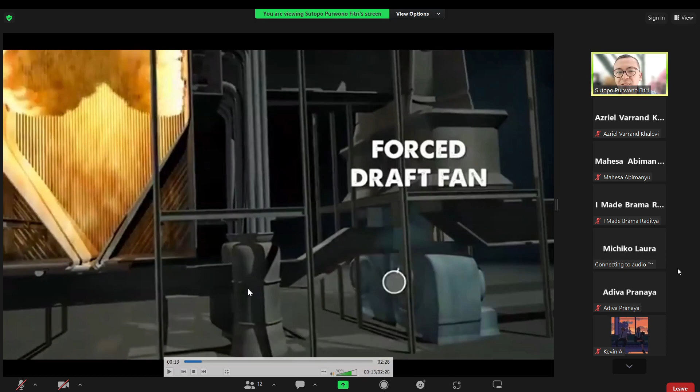Today's boilers, as they have been since their origin, involve complex production and manipulation of steam. Can you hear the video sound? Yes, sir. Bisa kedengaran ya suaranya? Ini saya pause. Dengar, Pak. Bisa ya? Bisa, Pak. Okay, I repeat.

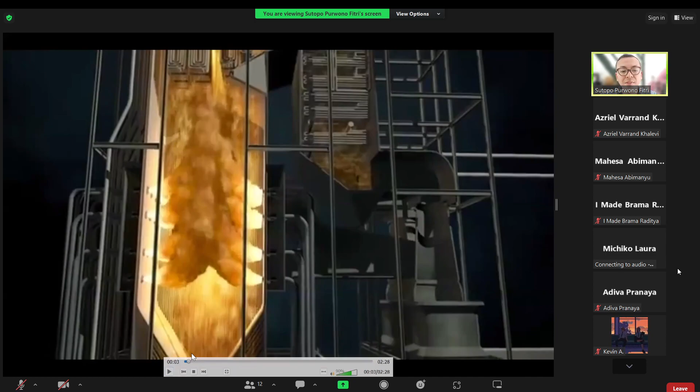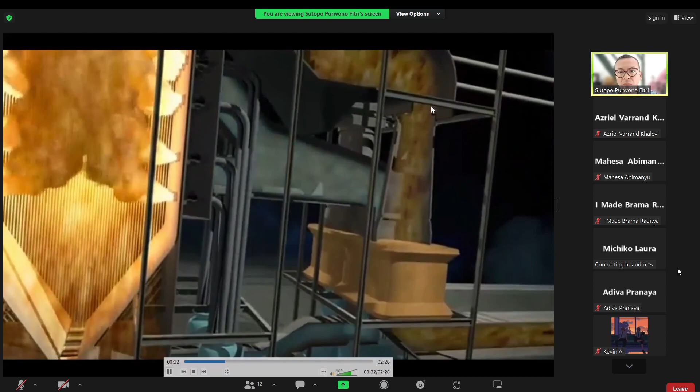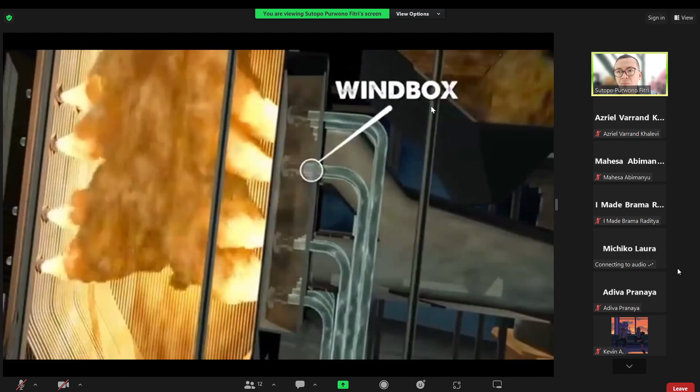Today's boilers, as they have been since their origin, involve the complex production and manipulation of steam. The forced draft fan blows air into the system. A portion is routed to the pulverizers, which crush coal into a fine dust before pushing the mixture up through feeder tubes. The other portion passes through an air preheater, which transfers heat from the exhaust gases to the incoming air, raising the air temperature, reducing moisture, and producing a cleaner burn. The hot forced air and coal dust converge in the windbox, where the mixture is blown out through burners and ignited inside the firebox, transferring radiant heat to the water-filled tubes. The hot gases flow upward, heating the rest of the system through convection, before passing through the air preheater and ultimately flow to the scrubber, where pollutants are removed.

Okay, so we see this video. The video shows the basic operation system, the running of the boiler, starting from the combustion process inside the furnace, to burn the fuel and heat the tubes. We can see this is a kind of animation. This is not a real boiler, but it's almost similar to the real boiler.

So there are many tubes, numerous tubes inside the furnace, containing water inside. The furnace creates a combustion process, to burn or heat the tubes, the rising tubes. Then the flue gas goes to the stack, or maybe this pipe, the port of the exhaust gas. There are many systems that we will discuss later, from the firing system, the feed water system, the exhaust gas.

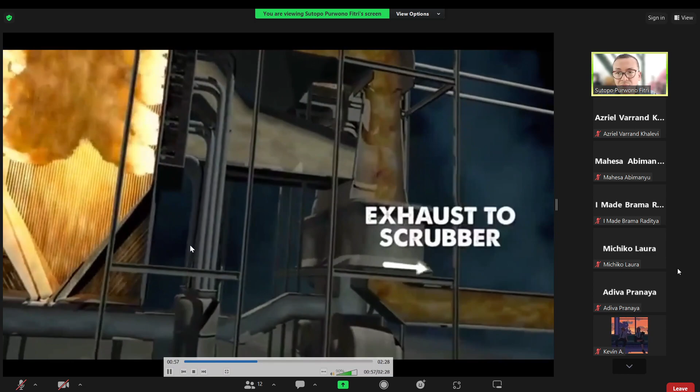So as I mentioned maybe in the former meetings, the exhaust gas or flue gas is not only for heating up the rising tubes, but the rest of the energy can also be utilized to heat the superheater, the economizer, and also the supply air preheating. So the preheater is very important for the supply of air for the combustion process in the boiler, because this is an external combustion engine, different from the internal combustion engine. So the exhaust gas, before discharging it to the atmosphere, sometimes needs to flow to the scrubber, to reduce the emission.

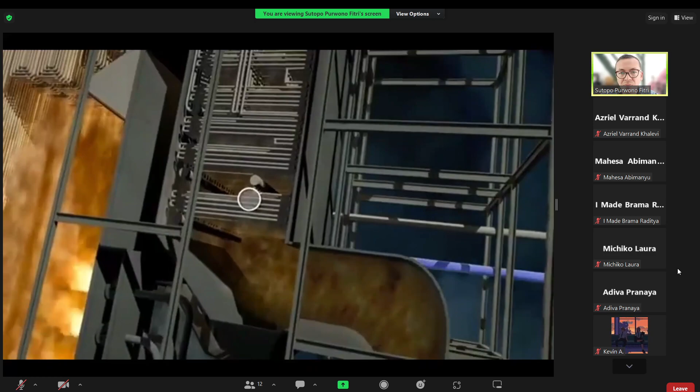Where pollutants are removed, liquid water is pumped into the system at the economizer. Gradually, it's heated to base temperature before gathering at the steam drum, the system's main distribution hub for circulating water and steam through the boiler. Liquid water flows through large downcomers and into the base of the firebox. A network of 2-inch tubes line the firebox walls, and burners force feed a continuous supply of combustible fuel into the ultra-hot firebox. Eventually, the insides of the firebox burn so hot that its surrounding steel walls would melt if not for the tube-lined walls of liquid water.

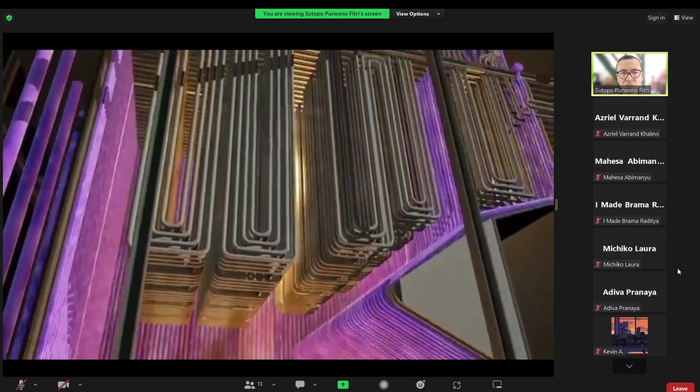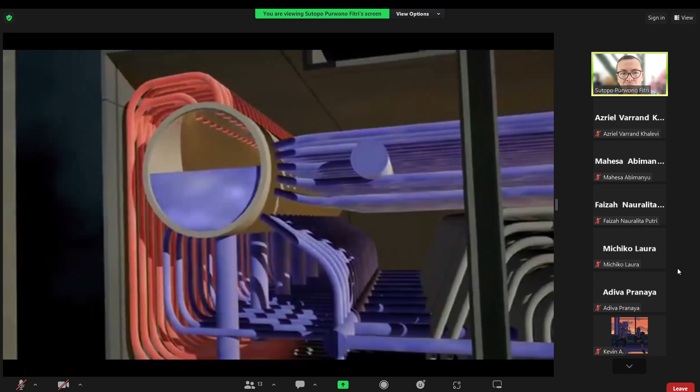At the point in the cycle when the liquid water turns to steam, the steam separates and collects at the top of the steam drum. Because this saturated steam still contains small amounts of liquid water that would cause corrosive damage to the turbine, the saturated steam is routed back into the firebox and through superheaters to burn off all but the smallest traces of liquid water. This dry, superheated steam then exits the boiler, passing through a steam header and ultimately providing power to the spinning turbine, which generates electricity. Finally, exhaust steam, now at a lower temperature and pressure, is sent back to the boiler through a dedicated reheat stage. This reusable steam is brought back up to operating temperature before returning to the turbine, providing additional power through a secondary stage.

Okay, so today we will not discuss about the steam circulation or maybe the air preheating, the other system, but we will focus on the combustion.

So from this video, maybe you have seen the first step of the boiler operation. You have a combustion inside the furnace, and you have also the rising tubes containing water. And then the flue gas or the exhaust gas should be discharged to the environment.

But before discharging to the environment, you can use it as energy to heat the steam, the saturated steam. The steam from the rising tubes goes to the steam drum, but the condition is still saturated, and it is not allowed to use it saturated for the rotating turbine. So you have to superheat it first, and in the superheater you have the dry or gas vapor form.

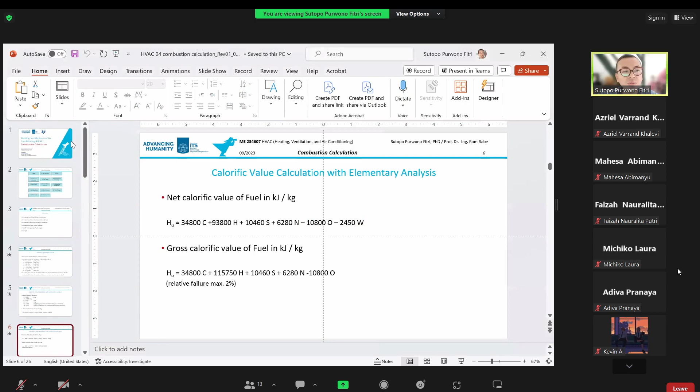Okay, can you see the slides now? Yes, sir. Okay, so the combustion calculation is the fourth module.

We will talk about the stoichiometric. This is one study for the basic knowledge, the basic theory for the combustion calculation. So stoichiometric you have studied, I believe, in high school, maybe in senior high school for chemistry, in the chemistry lecture, in the chemistry class.

Or maybe during the first or second semester you will study about chemistry. So this is a basic study for the combustion calculation because stoichiometry involves the basics of how to know what are the components of the fuels, for the reaction of the chemical bonds in the fuel, the chemical reactions.

And then also the non-stoichiometric, the practical aspects, the firing system basics — and later we will study more about the firing system in the next module — and also the exhaust gas specific heat. Then we will end our lecture today with an example, the example of problems for combustion calculation.

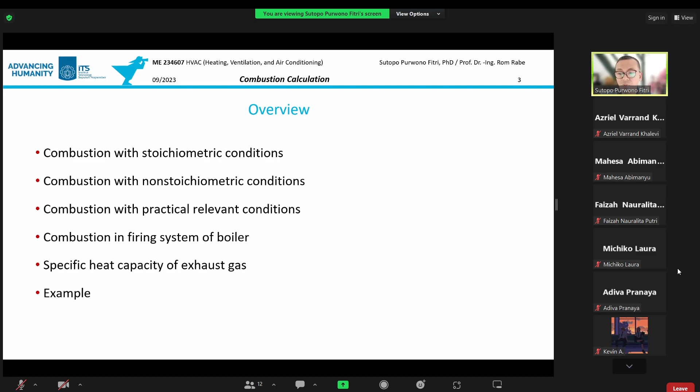So for the stoichiometric or the elementary analysis of the fuel, you have to know first the components bounded in the fuel. As I explained on Thursday, you can use any kind of material as fuel if the material has the main component of carbon.

So carbon is the most required component of fuel, and the other components are in small amounts, small percentages in the fuel, but totally you have 100% components.

So we have carbon, hydrogen, sulfur, oxygen, nitrogen, ash, and water. On Thursday I explained to you about these components in the hard fuels, liquid fuels, and also the gas fuel.

So mostly during the combustion process, maybe you have also studied this in the internal combustion engine or diesel engine lecture, about the combustion calculation for the diesel engine, or the reaction between the fuel and the air, or the oxygen. So mostly the carbon, hydrogen, and sulfur make a reaction with the oxygen during the combustion.

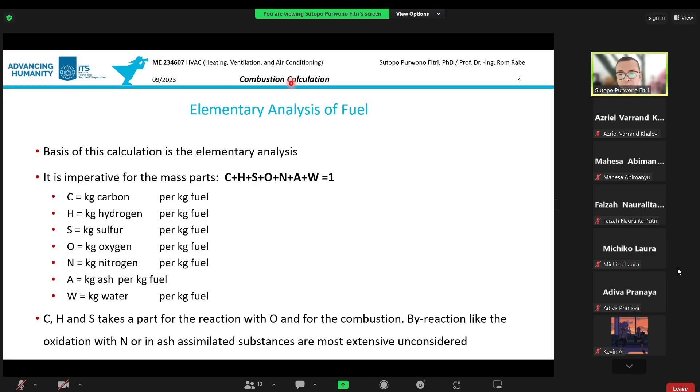So as I mentioned, the fuel for the combustion has the calorific value. Any kind of fuel has a specific calorific value. This is very important. As I mentioned formerly, this is the main value required for the fuel in the combustion process.

So you have to first analyze what is the total calorific value in 1 cubic meter or 1 kilogram of fuel. So we can use the basic stoichiometric approach for the calorie value, the heat bounded in its components.

Usually carbon has an energy per kilogram around 35,000, or 34,800 kilojoule per kilogram. And then hydrogen is much higher than carbon, around 100,000 kilojoule per kilogram. And then you have sulfur around 10,000 kilojoule per kilogram, nitrogen around 6,000 kilojoule per kilogram.

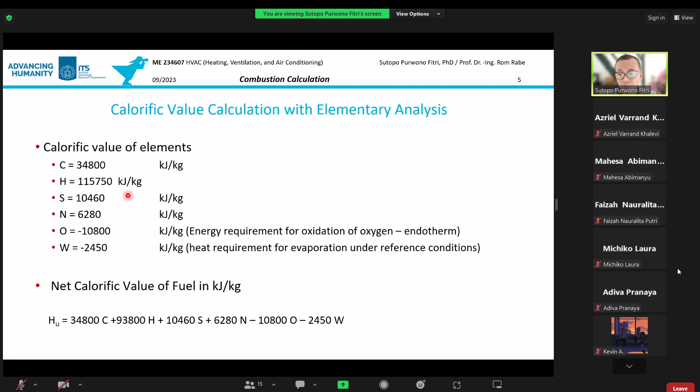This is the formula for net calorific value, and then this is for gross calorific value, in kilojoule per kilogram. And for gross, this is also the prediction or estimation.

You can see here that for net calorific, usually during the combustion not all the hydrogen is fully or completely burned in reaction with oxygen. And then in the net, usually there is a lower energy for the hydrogen. But in the gross calorific value, you can use completely all the bounded energy in the hydrogen, and use it for the analysis of gross calorific value.

You can see here that, as mentioned, you have to put minus for water in the net calorific value, because you cannot get back the energy from the evaporation of the water in the fuel, especially in hard fuels. But in liquid fuel or maybe gas fuel, you don't have the water, so you just skip it - you cannot delete it, it is simply not included in the calculation.

But in the gross calorific value, because you get back the energy by the condensation, maybe in the end after the combustion, then you have completely the energy. So you don't need to reduce or subtract the energy of the water from the reaction energy of the combustion. But here you still minus because the oxygen is absorbed during the combustion.

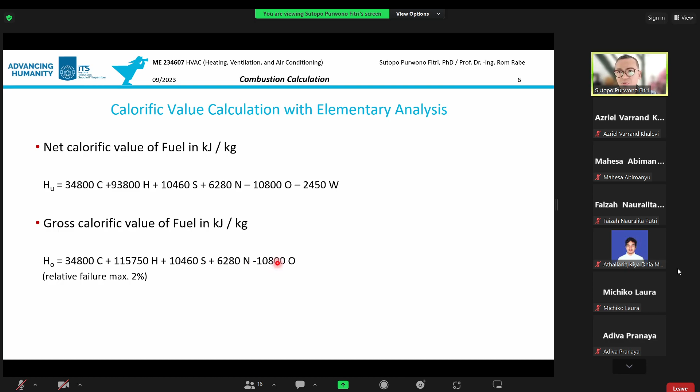Okay, for liquid fuels, you can use another formula here. So this is based on the function of the density of the liquid fuels.

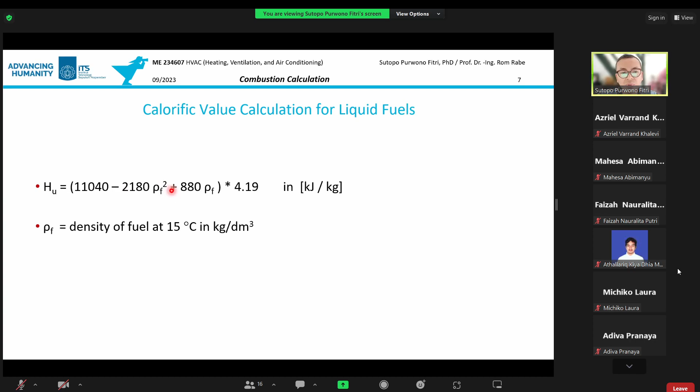And usually during the combustion process, as I mentioned formerly, you have a process of reaction - these are the chemical reactions during the combustion, especially from the carbon, hydrogen, and sulfur with oxygen. So if carbon reacts with oxygen, then you produce CO2. And if hydrogen reacts with oxygen, this is the basic stoichiometric, you have studied this in senior high school I believe, and maybe in the first or second semester.

So you produce water, H2O, and then sulfur reacts with oxygen, then you produce sulfur dioxide.

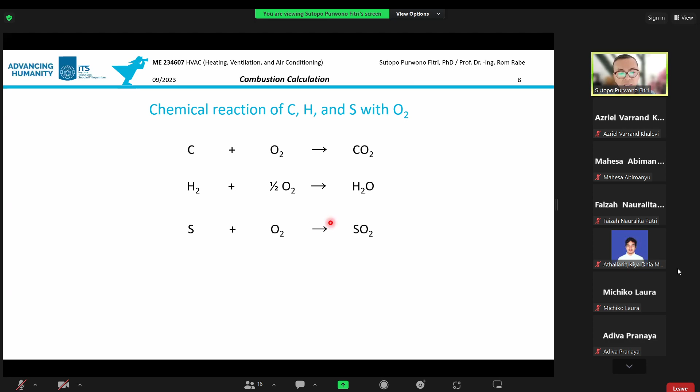The mass of the molecule, the mass of the hydrogen is 1 - you can make it in absolute value as 1. And then the oxygen, usually you use 16 for the weight of the molecule or mass of the molecule, and then for example the carbon is 12, and for the sulfur is 32. So I believe you remember these values.

Okay, for example, from this reaction of carbon, hydrogen, and sulfur with oxygen - because you have the carbon mass as 12, the hydrogen, because the symbol of hydrogen is H2, then you have the total mass as 2 kilogram per kilomole, and the sulfur is 32. And O2, because you have 16 for one molecule, then if you make a chemical reaction with oxygen O2, then you have 32 kilogram per kmol.

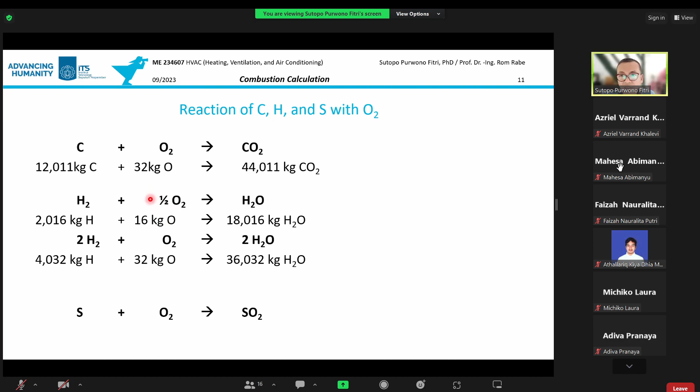You can also make another reaction by changing the constant here. This is the basic stoichiometric. I believe you can also make this kind of analysis, and then you have 2 molecules of water, so you have a 2-fold higher total mass of water.

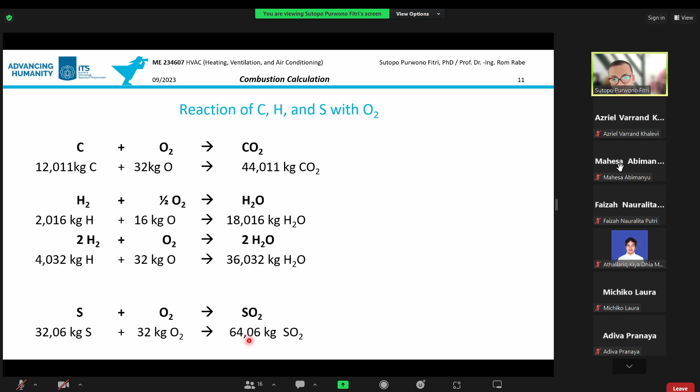And for the reaction between sulfur and oxygen, you have SO2. Just add it all up and calculate the total mass - you have around 64 kilograms of sulfur dioxide. I believe there's no problem. You can also make the analysis for this kind of stoichiometric, the basic stoichiometric calculation.

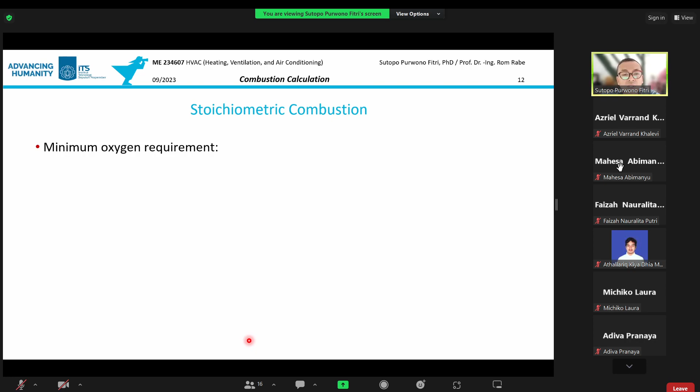Okay, for the next stoichiometric calculation for combustion, you can also analyze the requirement of oxygen for the combustion process. The minimum requirement of oxygen, you can use this formula in kmol of oxygen per kilogram of fuel.

Just put the percentage contents, the percentage bonded energy for each component in the fuel here. For example, carbon you have 90%, so just put 0.9, divided by 12, by the constant here.

Using H per 4.032 plus S per 32.06 minus O per 32. Just put all the percentage energy, and at the reference value of 0 degrees Celsius and 1 bar, you have 32 kilograms per kmol of oxygen, and if you use cubic meters, then you have 22.4 cubic meters per kmol.

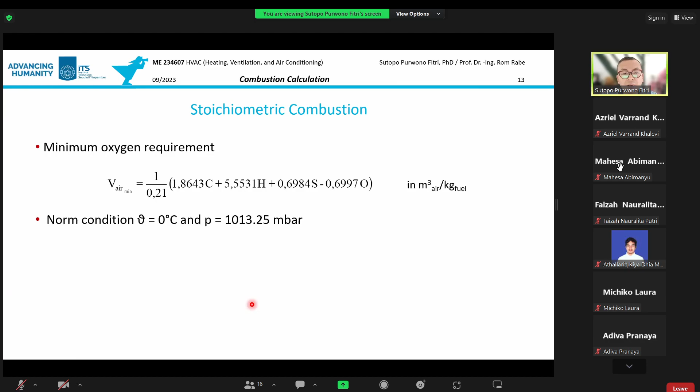And the next formula is about the minimum air requirement. It should be the... wait a moment.

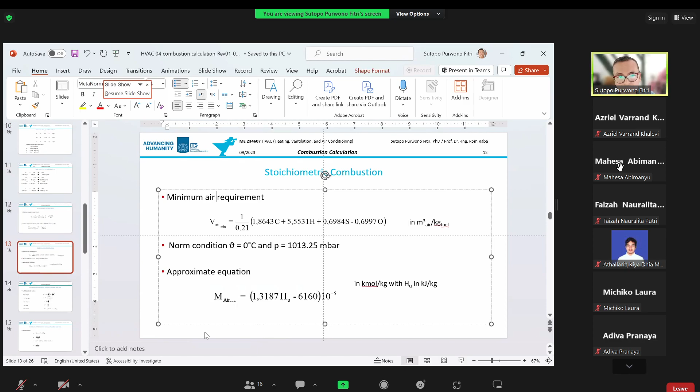Okay, so this is the air. Usually for the combustion process, you don't use pure oxygen - you just grab the air from the ambient atmosphere. For example, if you put the diesel engine or the boiler inside the engine room of the ship, the required oxygen for combustion is grabbed from the surrounding air inside the engine room. So you don't need to supply pure oxygen, for example from a bottle of oxygen or maybe from a pipeline of pure oxygen.

It's not necessary, just get it from the air. So in the previous slides there was the oxygen formula, the required minimum oxygen, but you can also make a calculation based on the minimum air requirement. This is also based on the requirement of combustion for the boiler, or the fuel combustion.

So in order to have a good combustion process by the mixture, the reaction of the fuel and the air, you need a minimum supply of air. Maybe you remember I also mentioned the two types of mixture - you have a lean mixture between air and fuel, or maybe a rich mixture. So you have maybe heard about the air fuel ratio.

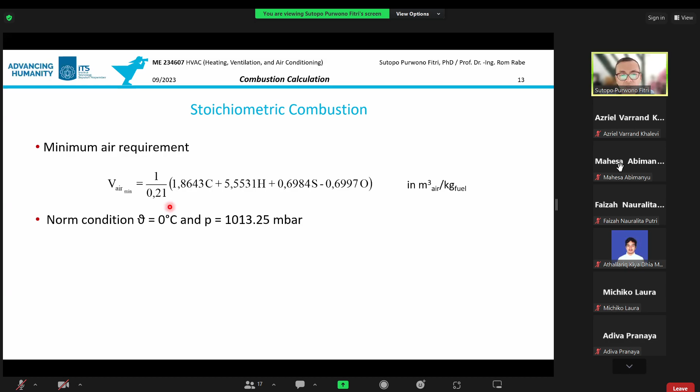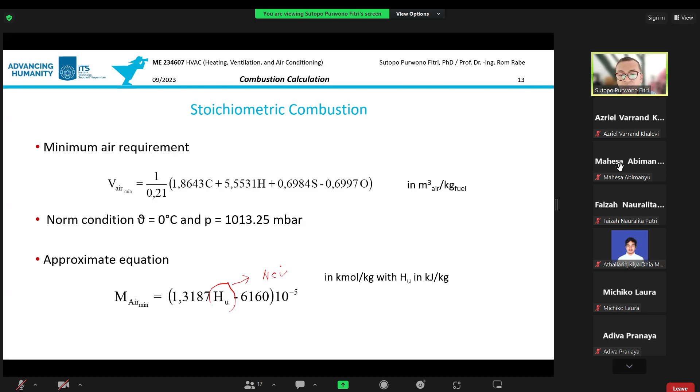you can also make an approximate equation. This is the mass minimum air requirement in kmol per kilogram, based on the net calorific value. So Hu here is the net calorific value. You can also use this formula for the approximation of the minimum air requirement in kmol per kilogram of fuel.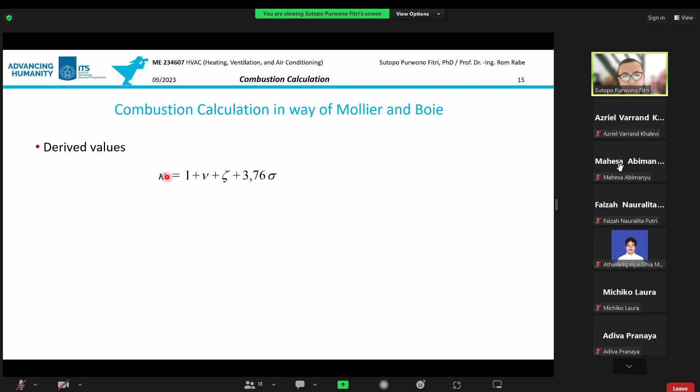So then you can use kappa here. This is kappa equal to 1 plus nu plus zeta plus 3.76 sigma.

And then you need another constant, called phi: 0.21 kappa divided by sigma. And you have also another psi, with this formula. And K here, sorry, this is not kappa, this is K. This is 1 over CO2 max. This is the concentration of CO2.

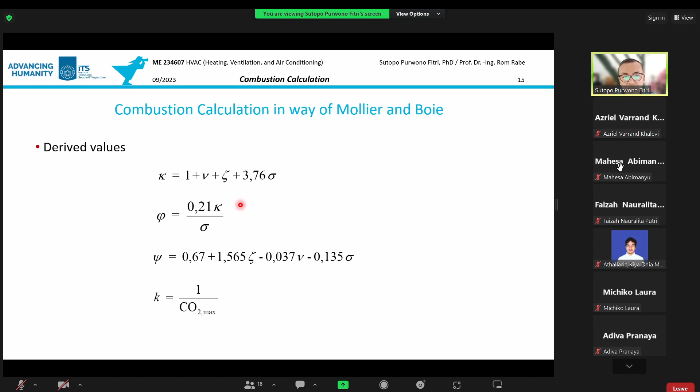So now you can use the Mollier and Boie analysis based on several constants to calculate the minimum oxygen requirement, the mass of oxygen required for the combustion. This is based on K and sigma, in kilogram of O2 per kilogram of fuel. So K here is based on this value, or you can use this value.

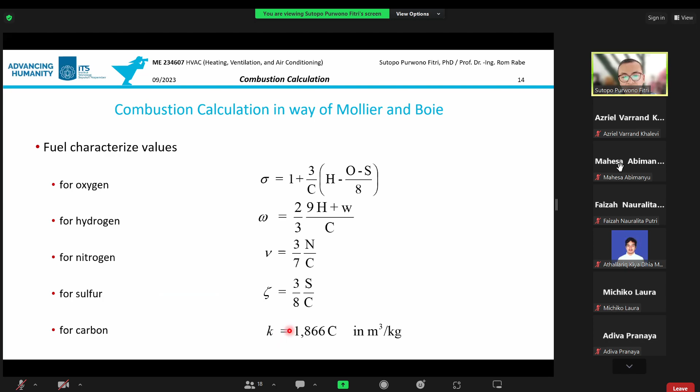And the minimum air requirement - so the above one is the oxygen requirement, and this is the air requirement, also a function of K and sigma. This is kilogram air per kilogram fuel.

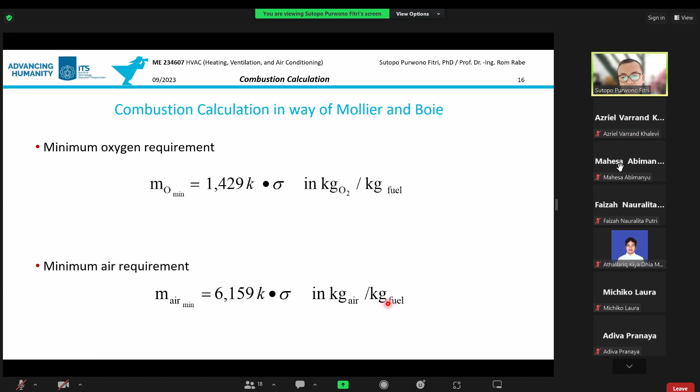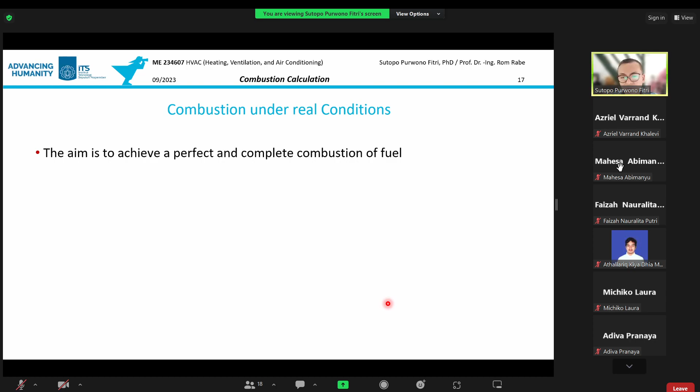For real practice conditions of combustion, you need to have a perfect or complete combustion of fuel. But maybe because of the content of components in the fuel, for example if you use liquid fuels, several deposits, or maybe other undesired parts as fuel, or maybe in the coal you have water, ash for example, so you have unburned materials.

But it is avoided - these are the undesired materials during the combustion process. So you have to make sure you have as good as possible, as perfect as possible combustion. Then you have low unburned material. And the theoretical heat of combustion for the analysis can be used.

And one of the main components for the combustion analysis is the air excess ratio. It means the index of the requirement of the air. Lambda, the air excess ratio, should be bigger than 1. But a high lambda or excess ratio would result in additional heat losses, and you have to minimize the losses. Then in order to minimize the losses, you have to minimize the air excess ratio.

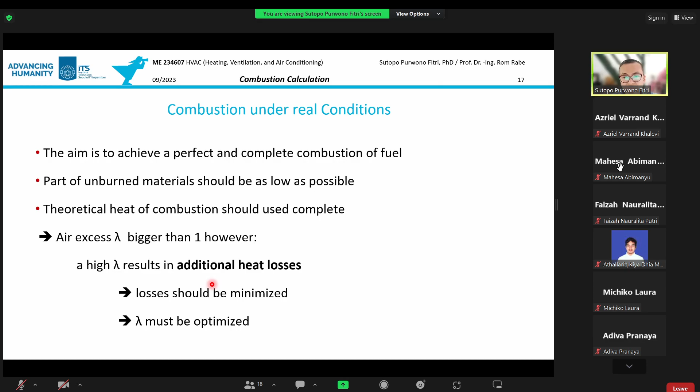You have to optimize. So the air excess ratio is the ratio between the mass of air divided by the minimum air requirement. During combustion, for example, sometimes the blower or ventilator supplying air during the combustion process supplies more than the air required for the combustion. So then you can calculate the air excess ratio, like this one.

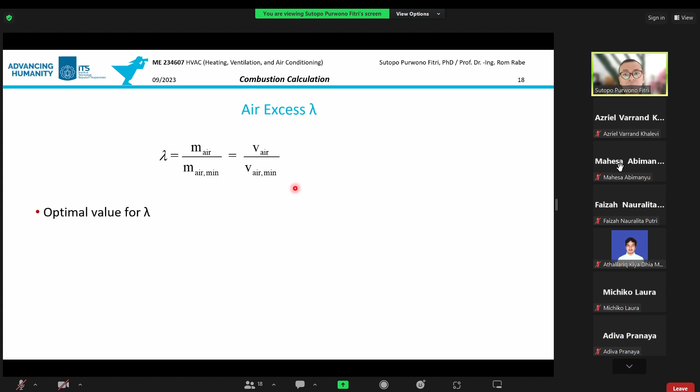So for the optimal value of the air excess ratio, if you use rust firing, it means the coals. Usually the optimal value of the air excess ratio is between 1.25 up to 1.35.

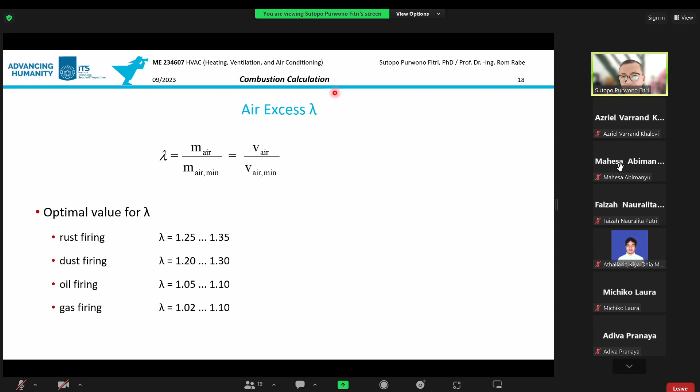For the oil firing and gas firing, you have a lower excess air rate. So you don't need a lot of air for the combustion process. You need to optimize it.

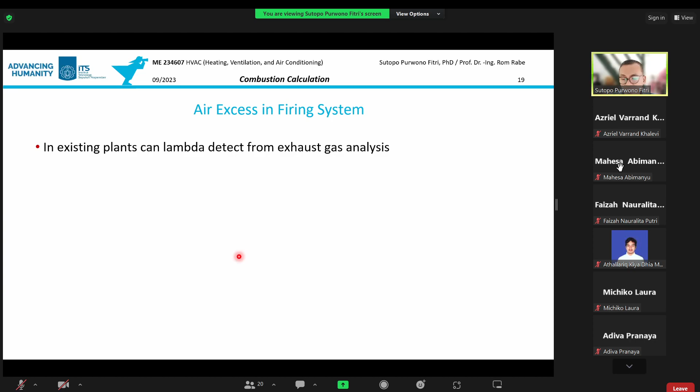So the lambda, or the air excess, can be analyzed or predicted from the exhaust gas analysis. For example, if you use an exhaust gas analyzer - I think in our department we have such tools, or Pak Buze, I believe he has one for the laboratory in MOM - such kind of exhaust gas analyzer. You just inject a probe into the exhaust gas port, so the probe can detect, calculate, and measure the exhaust gas parameters and also the components.

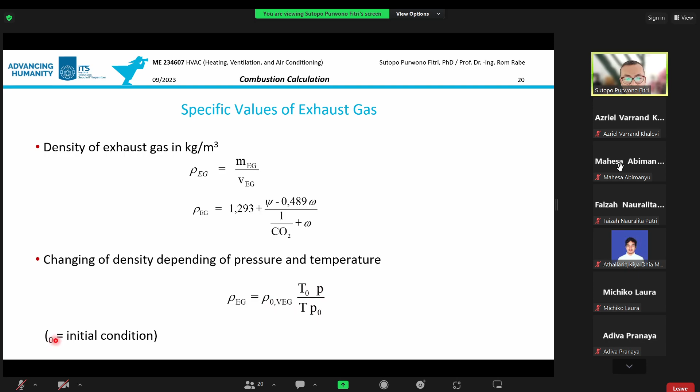If you want to change the density, then you can also make an adjustment or measurement based on pressure and temperature. So 0 here denotes the initial condition.

For the specific heat of the exhaust gas, you can define it based on this formula. You use the specific heat value from CO2, from H2O or water, from sulfur, from air, and also use the constants from Mollier and Boy - omega, zeta, sigma, nu, and so on. You just use all the constants from the previous calculation, from the Mollier Boy analysis. Then you can have the specific heat and also the other properties of the exhaust gas, or the enthalpy.

So as in the heat exchangers, maybe several, last week, we can also make an analysis for the NTU effectiveness method. Then you know the exhaust gas specific heat, or the steam, for example.

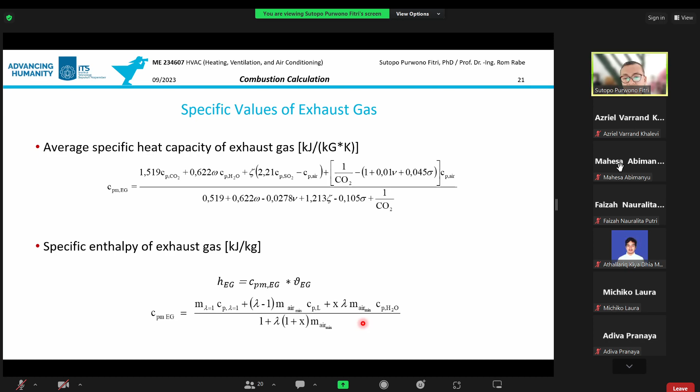And in a wet exhaust, it means if you have such a condition of the exhaust gas that contains water, the steam, from the evaporation during combustion, then it's called the wet exhaust. So then you need another formula to define the specific mass of the exhaust gas - this is also still based on the constants from Mollier and Boy.

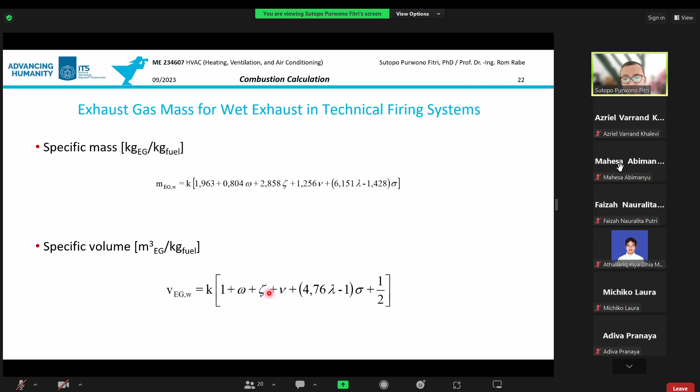Then you can also make a calculation of the specific volume, and also the density of the exhaust gas - this formula is also based on the constants of the Mollier and Boie analysis. You can also make a specific analysis based on the Bunte analysis - this is called the Bunte triangle.

So this is the CO2 value, the concentration, specific value of CO2, and this is the mix of O2 and CO2. You have the diagonal lines here with 45 degree of slope. This is the center diagonal of the rectangular ordinates.

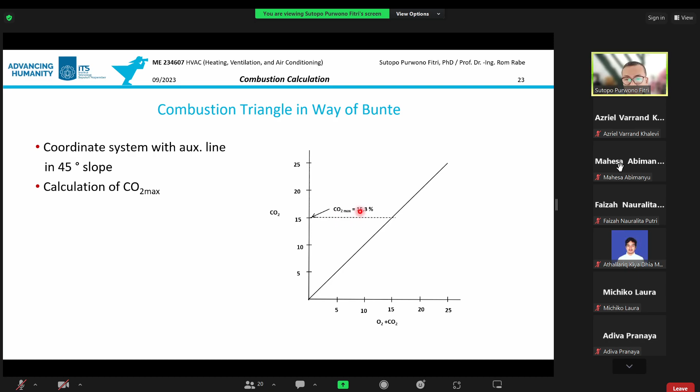If you know the concentration of CO2 from the measurement using the exhaust gas analyzer, then you can put it here, the value of CO2 concentration. For example, you have 15.3%. Just put the value of CO2 concentration and make a straight line and cross the diagonal line.

And then, if you have the value of the measurement, maybe using the exhaust gas analyzer, you have the concentration of oxygen 21%, then you just put it here, 21, and then make a straight line and cross at a cross section between the diagonal, a previous cross section between diagonal and horizontal line of CO2 presentation.

And then the construction auxiliary line, you can also put it in the Bunte triangle. This is for the combustion ratio.

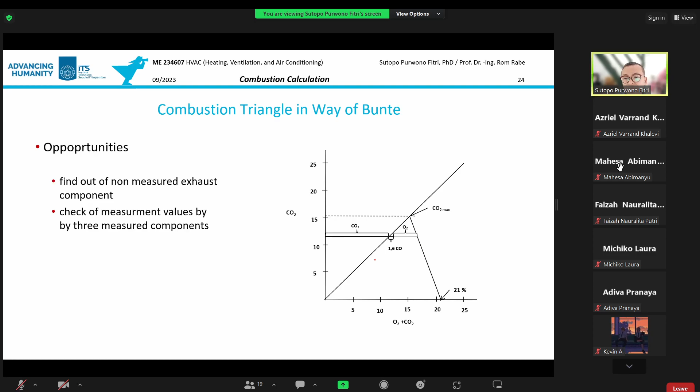So by the triangle of Bunte, you can also make another analysis to find out non-measured exhaust components, and also check the measurement value by the components of CO2, O2, and CO. Okay, so this is all the combustion calculation model.

So now let's see the example. Or maybe if you have a question, please don't be hesitant.

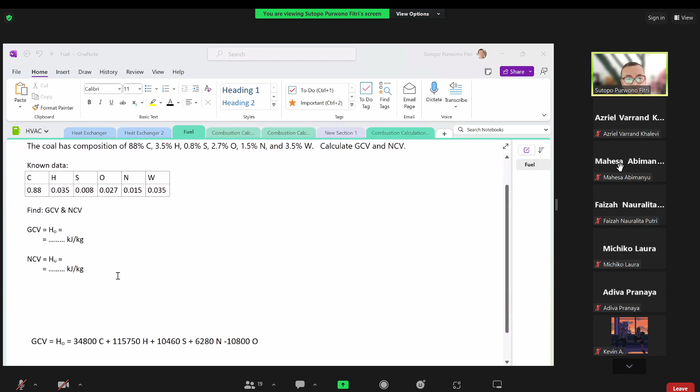So for calculation, the gross calorific value based on the modules, you can use this formula. So in the gross calorific value, you have a little bit higher energy, bonded energy of the hydrogen, compared to the bonded energy of hydrogen in the net calorific value. Okay, so you can calculate the energy.

34,800 times the carbon, you have 88%, and then plus the hydrogen energy times the 0.035, and then times the sulfur reaction energy based on the bonded energy of sulfur times the 0.008.

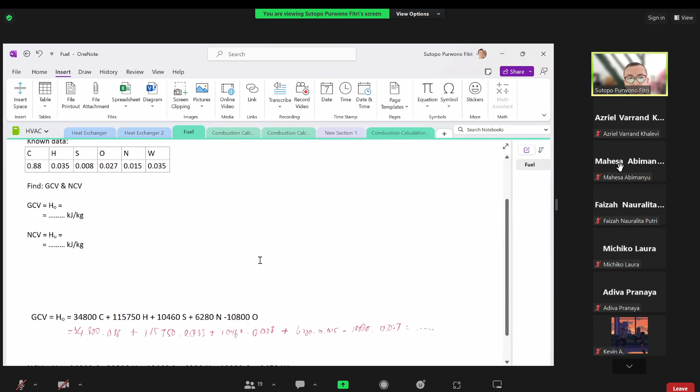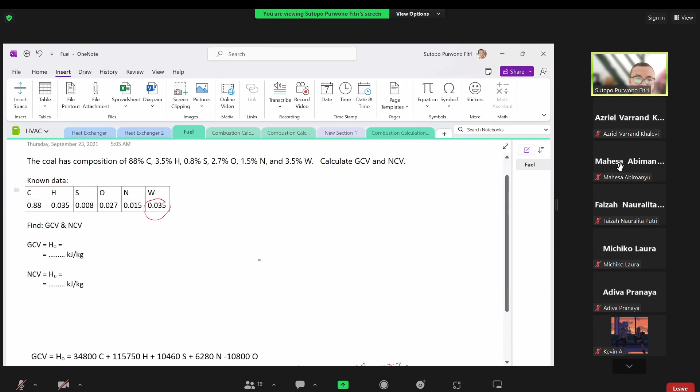Okay, so now you can have the result for gross calorific value and net calorific value. These can be used later for other analysis. I think there's no problem, it's easy. So you can now analyze the calorie value from the fuel.

For liquid fuel or gas fuel, you can also use other formulas. But this is the formula for coal, for solid fuel. Okay, I think there's no problem.

So let's see, you can open the seminar tasks for STEAM, the PDF. Start from number 7. The task is for fuel and combustion calculation. So for example, in task number 7,

you need to first determine the heat energy which is dissipated with the exhaust gas flow to the environment.

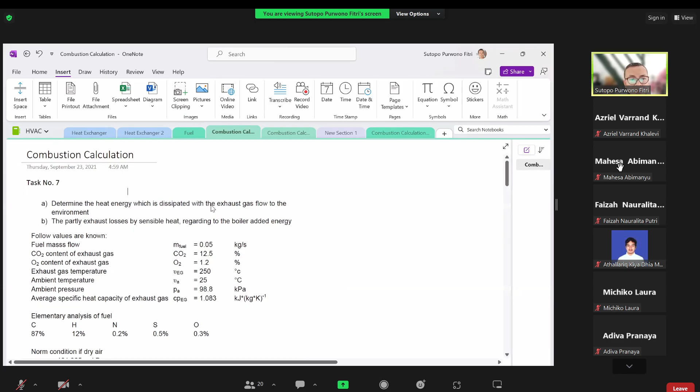So the first task is to determine the heat loss or the heat energy that is dissipated by the exhaust gas, and also partly exhaust losses by the sensible heat, regarding the boiler added energy.

So we can analyze the heat loss or heat energy, the heat losses in terms of sensible heat, by the process of combustion. So the boiler added energy means the fuel combustion process - the energy from the fuel combustion, the burn energy of the fuel combustion process.

Okay, so we have several known data here. The first one is the fuel mass flow into the furnace, into the combustion chamber. We have 0.05 kilogram per second. And then we have the CO2 content.

This is the CO2 and O2 content based on the measurement - maybe you can use the exhaust gas analyzer. So the CO2 content is 12.5%, the O2 content is 1.2%.

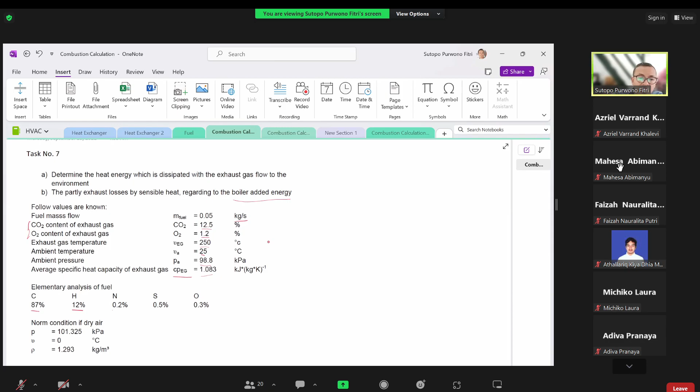And then based on the elementary analysis of the coal, you have the percentage of carbon 87%, 12% hydrogen, 0.2% nitrogen, 0.5% sulfur, and 0.3% oxygen.

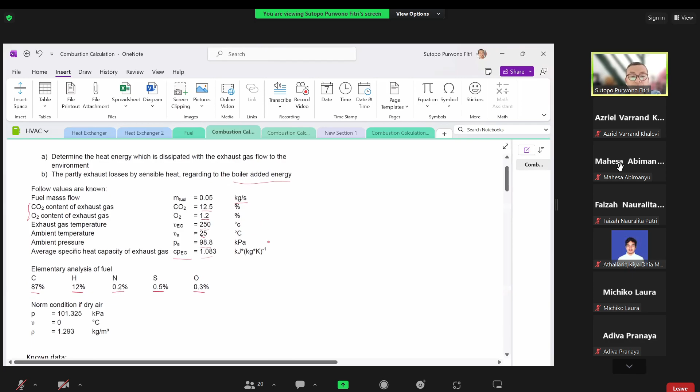But you have no data of the ash and the water - just let it be as it is. So you don't need to think about that required data, not the water and ash data.

So if you have the condition of dry air at atmospheric pressure and dry air at 0 degrees Celsius, the density of the air is 1.293 kilogram per cubic meter.

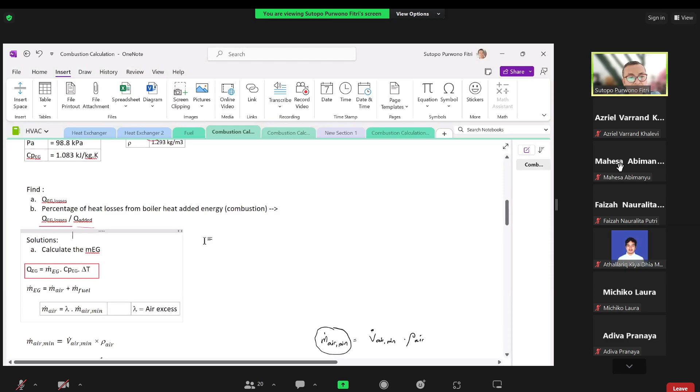So the heat losses divided by the Q energy from the fuel combustion process. Okay, so the first step is to calculate the mass flow rate of the exhaust gas.

Because the heat losses to the exhaust gas are based on the sensible heat, based on this formula: the mass flow rate of the exhaust gas multiplied by the specific heat of the exhaust gas and the temperature difference.

So the heat losses is the sensible heat that you can calculate. The specific heat of exhaust gas you have the data, the temperature you have the data, and then you just need to calculate the mass flow rate of the exhaust gas.

Now you can calculate the mass flow rate of the exhaust gas, because the exhaust gas is the result of the combustion. In the combustion process, you need the air and the fuel, so the exhaust gas is the mixing of the chemical reaction between the fuel and the air. The exhaust gas is the accumulation of the mass of the air and mass of the fuel.

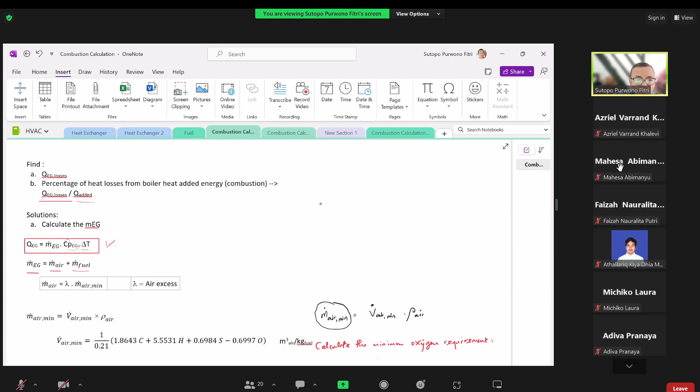Okay, now you need to calculate first the mass flow rate of the air. Based on the previous slides and models, we know the air excess ratio. The air excess ratio, or lambda, is the ratio between the mass flow rate of the air divided by the mass flow rate of the minimum air requirement.

Now we need to calculate the unknown minimum air requirement here. You can calculate based on the basic calculation to have the mass flow rate. This is the volume rate of the minimum air requirement times the density of the air. How to calculate the volume rate?

So you have the formula. This is from the former slides today. This is the minimum volume air requirement in cubic meter air per kilogram of fuel.

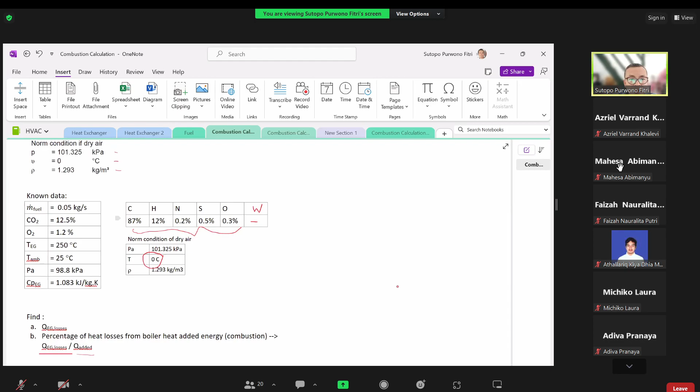The volume rate of the air minimum requirement is calculated by putting the concentration of carbon here, the concentration of hydrogen, sulfur, and oxygen. So you have the composition like this one: 87%, 12%, 0.3%, and 0.5% of sulfur.

Okay, just put it here, and then you have the data of the minimum air requirement. You have here, and then now you can calculate the mass flow rate, the required mass, minimum requirement of air mass. So you can calculate the value here of the volume air requirement, minimum air requirement times the density of the air.

Then you have the mass of minimum air requirement, this value, 14.124 kilogram of air per kilogram of fuel, times the second, because this is the flow rate. This is the flow rate. And then now based on the...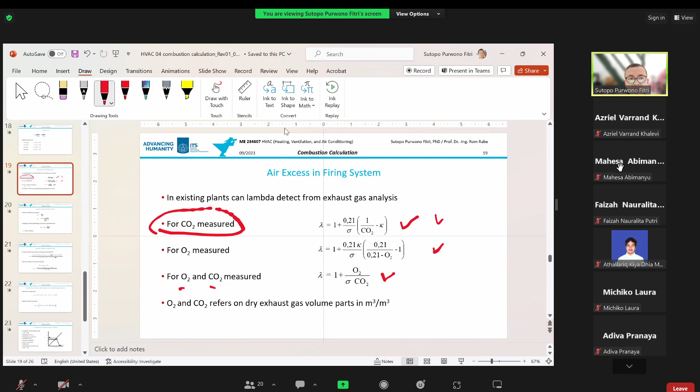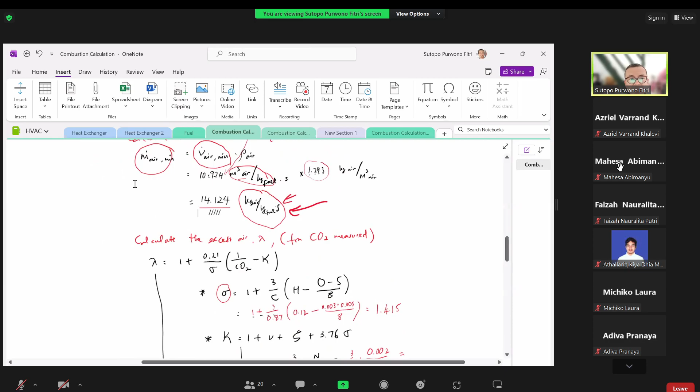Okay, now back to the OneNote. So now you can calculate the air excess ratio here, in order to calculate here, you need the value of lambda here. So you need to define the air excess ratio.

In order to calculate the kappa here, you need the value of nu here, this one, and also the zeta, and also the sigma. The sigma you can calculate based on the molecular weight, with this formula, in the modules.

Please check again, open again the slides, and you have the sigma value here, and then the kappa, and put the kappa here, and also the sigma here. Okay, now you have the value of air excess ratio.

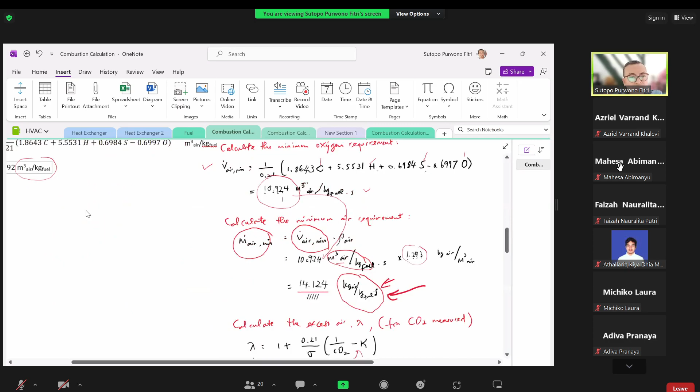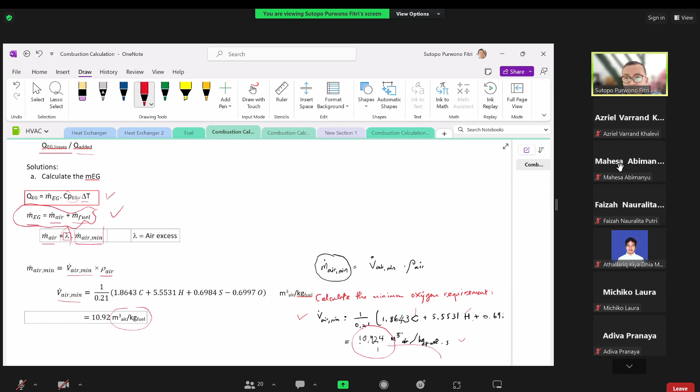Now you can calculate the mass volume of the exhaust gas, based on the previous formula, here. The mass volume of the exhaust gas is the sum of mass volume of the air and the mass volume of the fuel.

So based on the previous calculation, we have this value, the mass volume of the air, and plus the mass volume of the fuel. The mass volume of the fuel, we have the data here.

This is the mass flow of the fuel, 0.05 kilogram per second. Now you can have the mass flow of the exhaust gas. And then the next calculation, since you have the mass flow of the exhaust gas already, you can calculate the heat loss, or the sensible heat loss, to the exhaust gas.

Just put in the mass flow of the exhaust gas, the specific heat from known data, and the temperature difference between the exhaust gas temperature and the ambient air temperature. Then you get around 4,315 kilowatts. You can use the existing data for the specific heat of the exhaust gas.

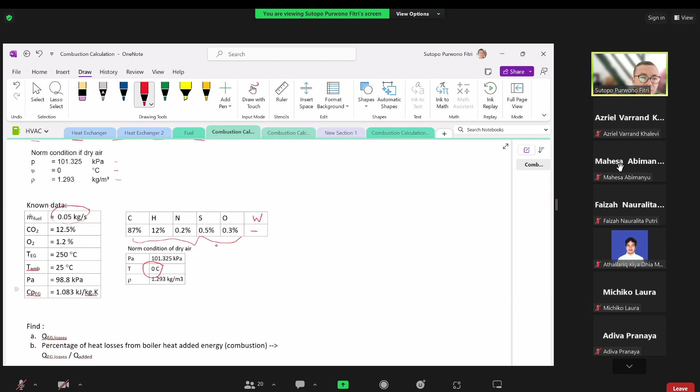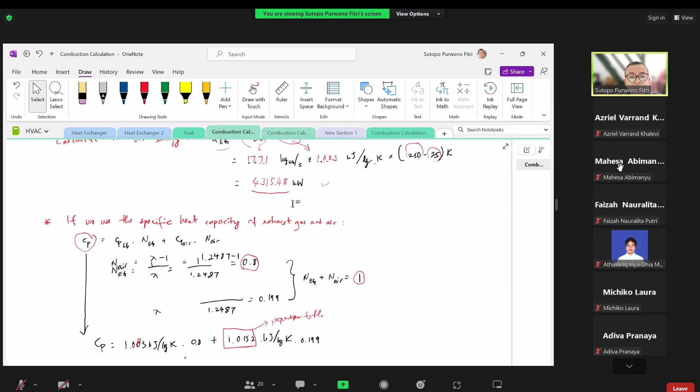Here, because you already have the exhaust gas specific heat, you can also make another alternative calculation to determine the specific heat of the exhaust gas based on the mixture ratio between the fuel and the air. It means the air content affects the specific heat of the exhaust gas. So you can use this formula, but anyway you can also use the existing data.

By the way, it's also no problem. You can use the other analysis, this ratio of the lambda, the air excess ratio, between the excess ratio of the air and the exhaust gas.

So for the air, this is the partial air excess ratio. You have the lambda formula, this one, lambda is actually 1.2487, you can put it as 1.25. And for the air like this, you can calculate here. Then for the exhaust gas, it is 1 per lambda, so you have around 0.8.

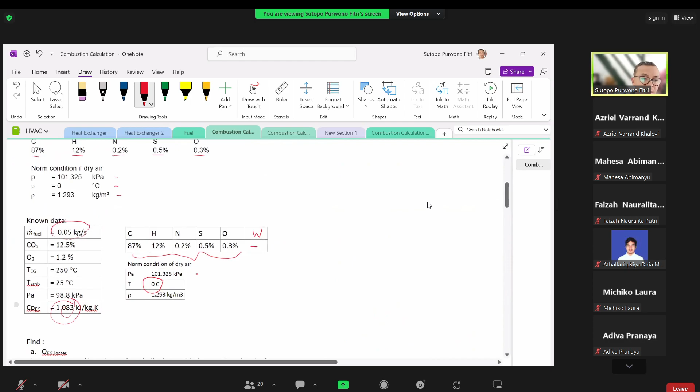Then you can put in the specific heat mixture of the exhaust gas, a mixture between the real exhaust gas and the air. You can use the existing specific heat here, 1.083, times 0.8, and this is for the specific heat of the air. You can use the data from the properties table to get the CP.

Then you can use this more precise condition of the specific heat in the calculation. So now you can have the condition of the heat loss, the sensible heat loss, based on the specific heat of the mixing between exhaust gas and air.

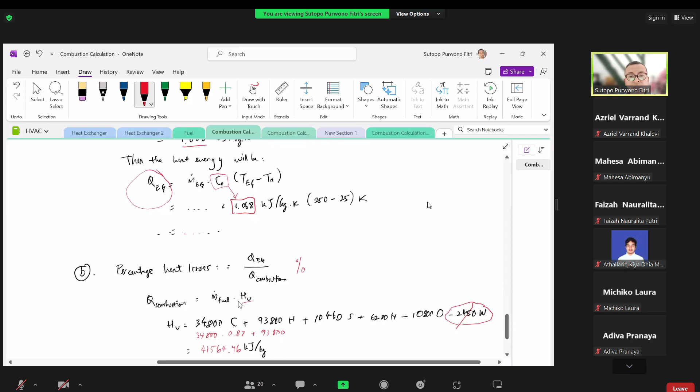Okay, the second task is to define the ratio, the percentage of heat loss. So the percentage or ratio, the heat loss ratio between the sensible heat loss and the Q added from the combustion process.

So the combustion process is the calculation between the mass flow of the fuel times the net calorific value. You can calculate the net calorific value using the basic formula. You have the net calorific value is around 41,564 kilojoule per kilogram. Then you calculate based on the mass flow of the fuel times the net calorific value, and you get the fuel combustion energy, or the added energy from the combustion process, around 2078 kilowatts.

Then you can make the next calculation: this is the energy of the sensible heat loss divided by the added energy. Then you have the ratio, the heat loss ratio.

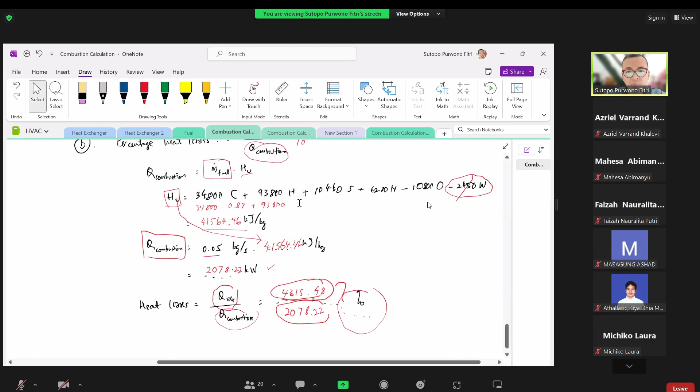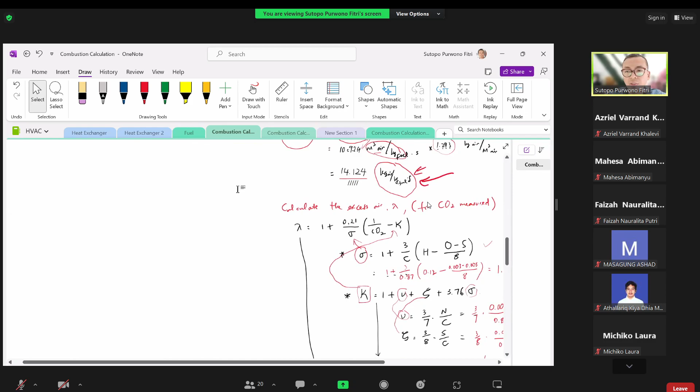Okay, that's the solution of task number 7, to calculate and determine the sensible heat loss, and also the heat loss ratio.